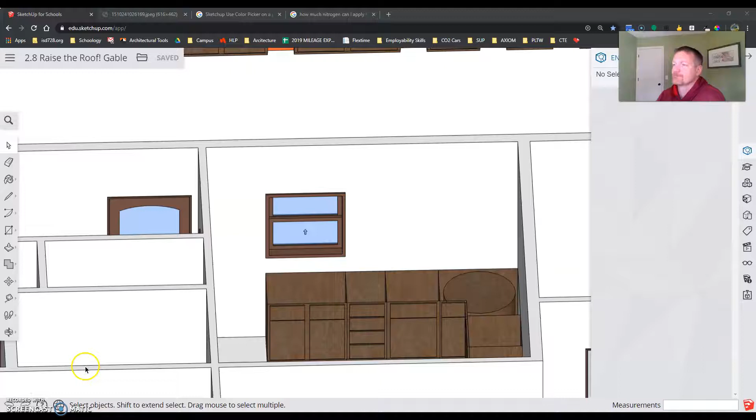I just fixed this window up here. We are ready to put our upper cabinets in, coming around here.

If I take a look at my drawing, here is my upper cabinet line in the floor plan view. I have a corner upper cabinet, and then I have a bunch of other upper cabinets that I have to figure out what sizes to put in there. So we're going to start with that.

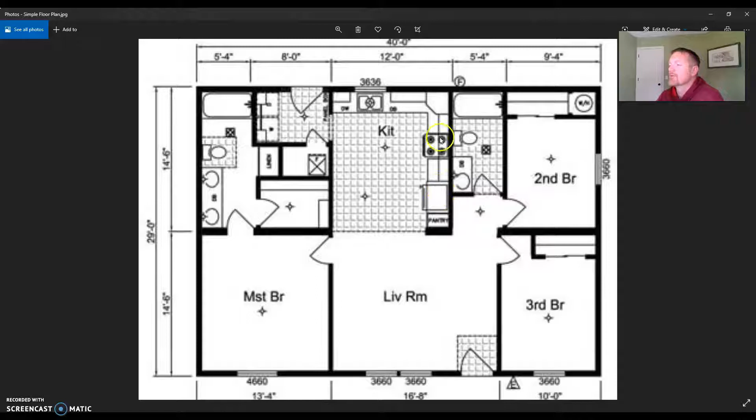Like we did before, we start with the corner. These here can kind of have a long tail end, so I don't have to worry about those. This one gets into a situation because we have the range here, so we're going to set that up with the range. And then we've got the refrigerator, so we're going to figure that end of it out.

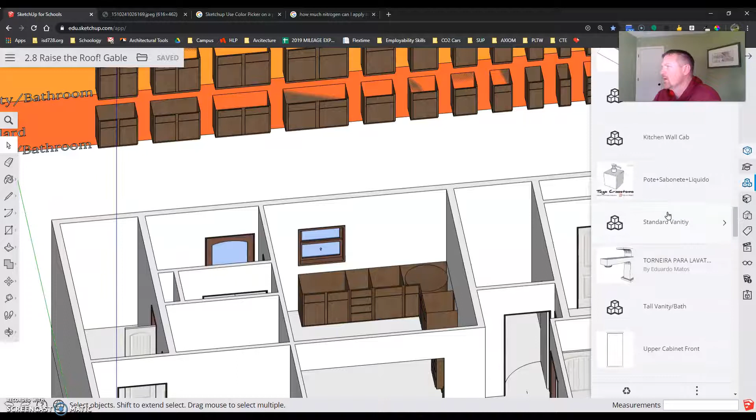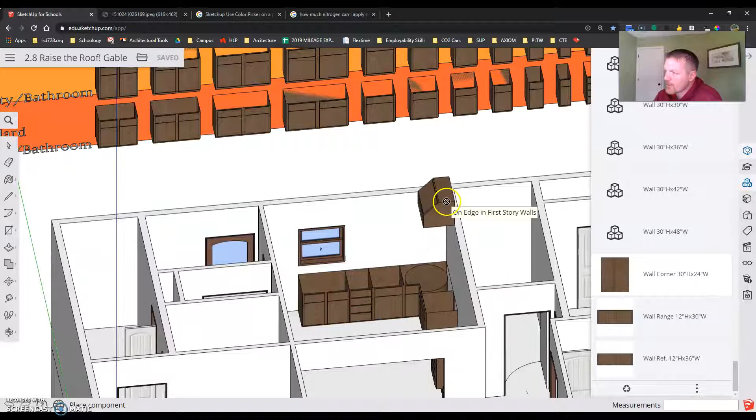Let's get this in the right place. I'm going to put it right in that corner right away. I'm on the right wall. Touch that corner. I'm happy there.

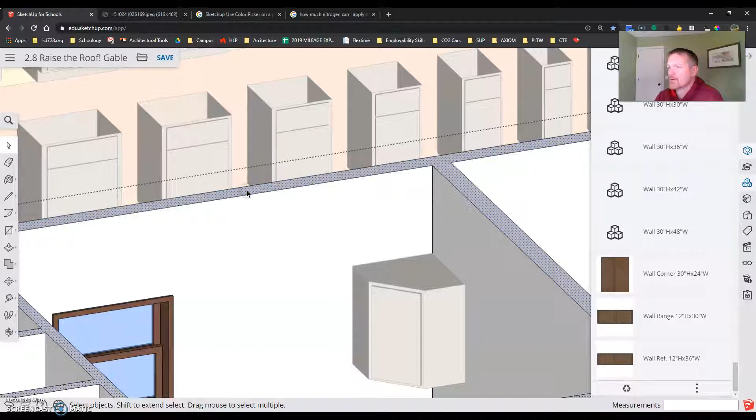Now we have to get some height set up. So I'm going to use my technique that I used on my doors. I'm going to come in here, right click, and hit Edit Group for the top of my wall.

So I went inside my walls. Now we're going to do a move. Tap the Control key and make a duplicate of this and set this right at the top of my kitchen cabinet.

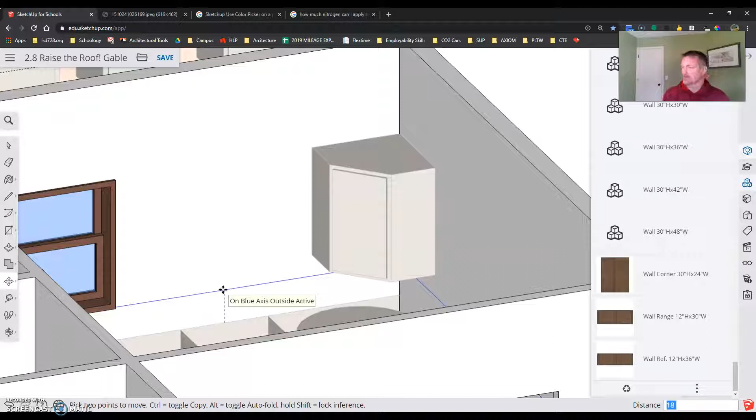As I said before, those cabinets are 18 inches above, so we're going to go 18 and hit Enter. And then they're 30-inch tall cabinets, so I'm going to bring that straight up, and go 30 and hit Enter.

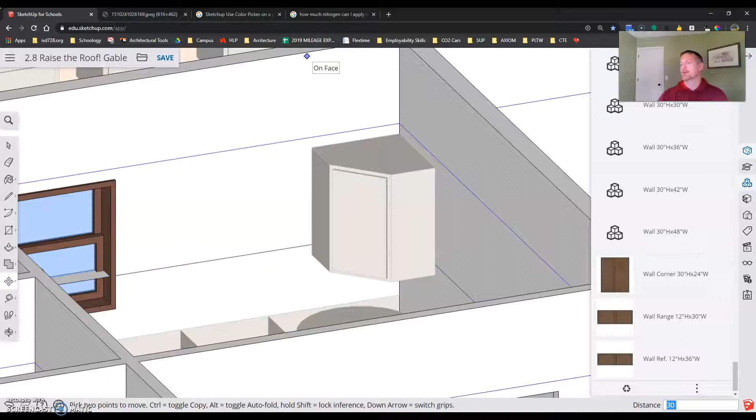Now that gives me two lines. I'll get back out of my walls, click outside. Gives me two lines to work with where these cabinets go, but the main one is the top. So I got that one taken care of.

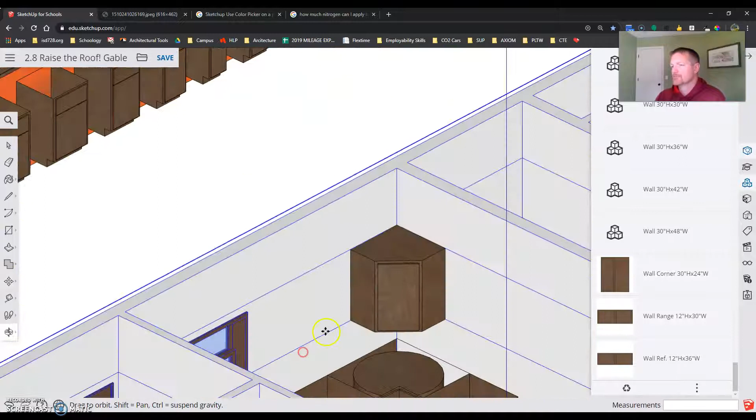I have the range cabinet here. If I remember, this is a 24-inch wall or base cabinet. So I'm going to go wall 30 by 24. I'm going to place it on the wall, and then I'll move it so it touches in place.

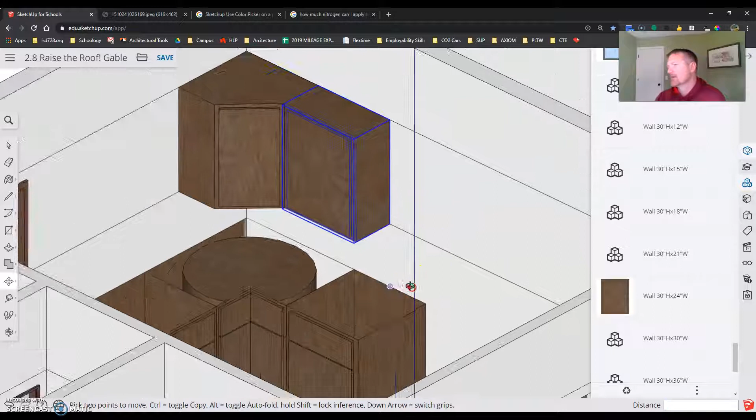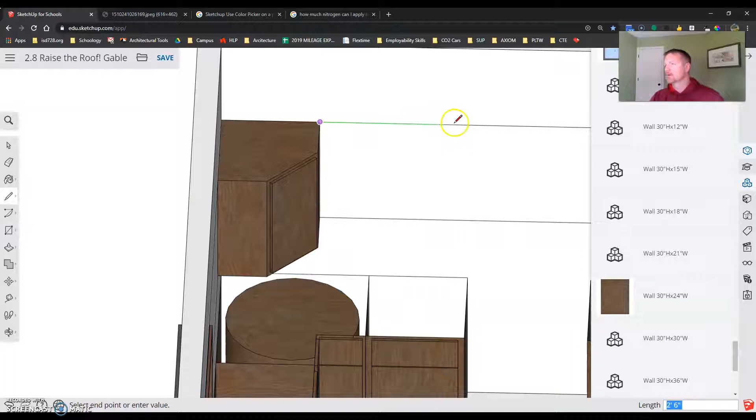And if you notice, that was a 24. This one didn't work. So let's take a peek to see what that measurement really is. If I take a line, start drawing a line here, hold down Shift so it's on that line, and come down and line that up, I look down at my length, it says 3 feet.

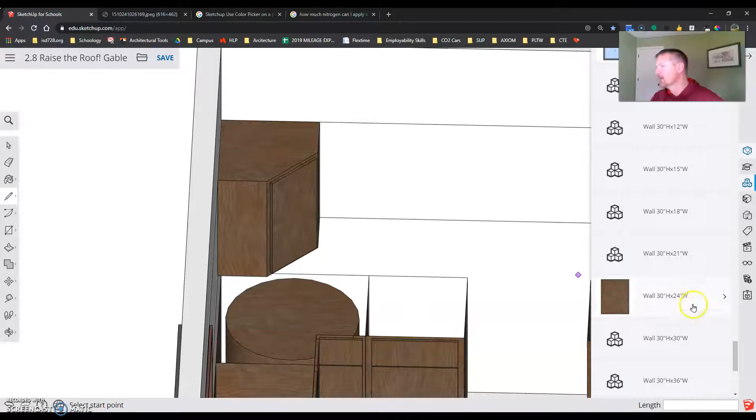So that's 36 inches. I'm going to put two cabinets in there, 24, and then I'm going to do a little filler cabinet in there. So we're going to do the 24, put that there, set it on the top line, move it this way, and touch it to that edge.

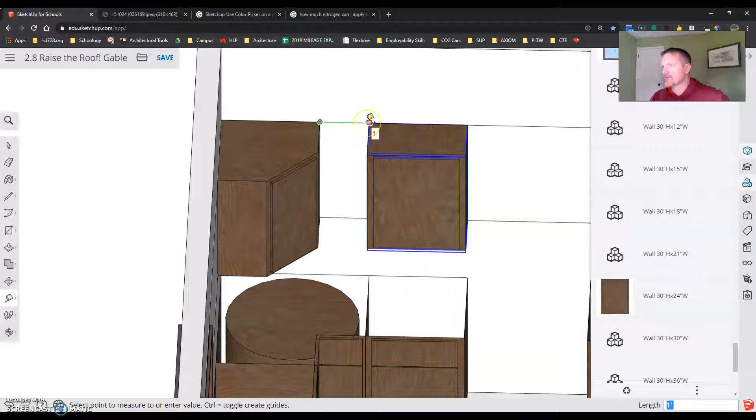Now I can figure out what this little filler cabinet's going to be. That's a 1-footer, so it's a 30 by 12. Plop that in place for right now. Corner to corner.

Get the 30-inch range opening. So if I look down here and wall range. Now you may be wondering why this is a little bit higher. But if I take a peek at our picture over here, the range has some room over the top for a range hood. So that's why it's a shorter cabinet.

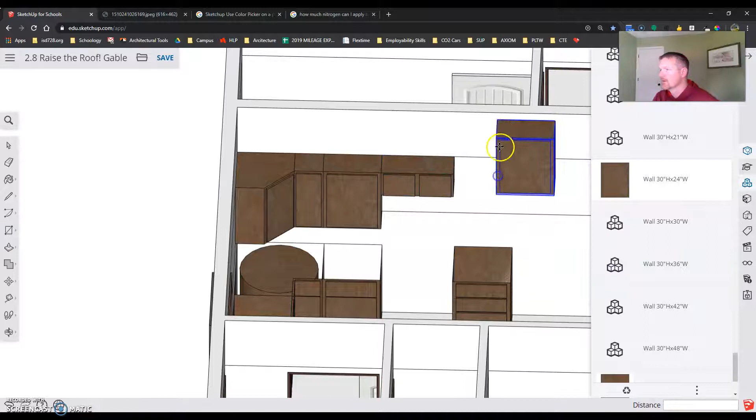Now this one I should be able to match up. Pencil tool, 2 foot, so 24. Wall, 30 by 24. Place it. Grab the corner, place the corner.

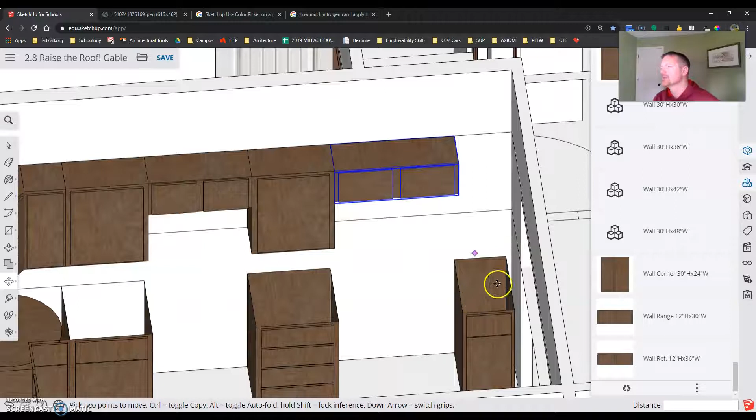Come down here, wall, refrigerator. REF stands for refrigerator. Place that one. And that brings us up to our last piece, which is this pantry cabinet over here.

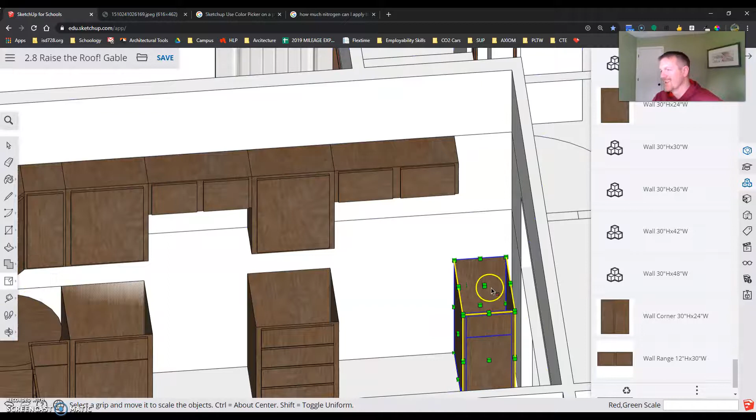So I'm going to right click on this and hit Make Unique. So I made this cabinet unique from any other cabinets that are in there. And then instead of the Move tool, we're going to use the Scale tool. Now this isn't exactly what a pantry cabinet is going to look like, but this is going to give us the piece there.

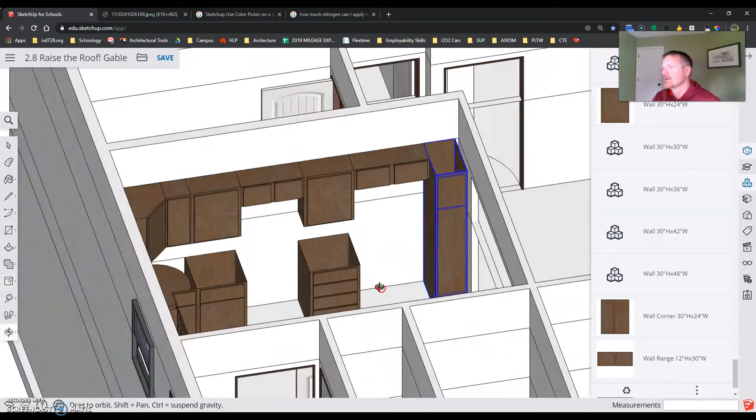So I am going to go to Scale. I'm going to click on the center scale and bring it up and touch it to the top. So it gives me a door, stretches my doors out big time, and it stretches out this toe kick area underneath, but it provides a pretty good idea of what that's going to look like.

And that is how we finish out the kitchen cabinets. I'm going to hit save.